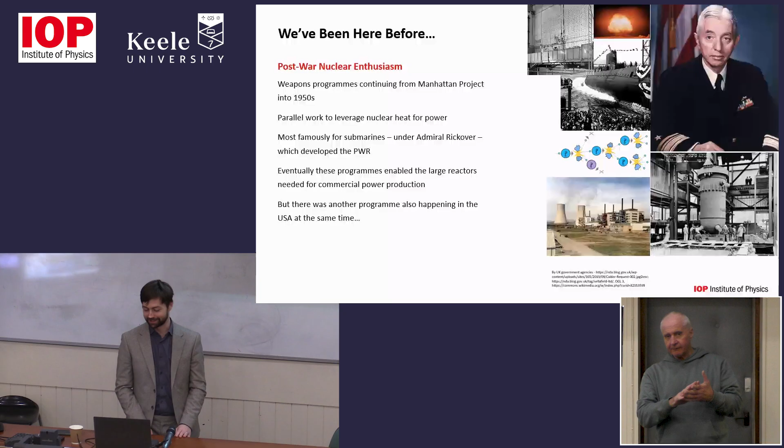Some of the other programs, and at this point, it's a new field. R&D is going out in lots of different directions. There's all these different technologies, and this one might be good, this one might be good, this one might be good. If you put a pin in that for what's happening today, there's quite a lot of parallels. The program we'll look at, that's not the naval program, so today we'll look at the Army Nuclear Power Program.

And they launched a series of reactors. Each one down on the right-hand side is a different reactor, all slightly different. They used a few different technologies, a few different locations and use cases. But the drivers for pursuing this, the goals, aren't that different from what we're doing today: reduce dependence on fossil fuels, reduce the logistics burden, reliable continuous power, infrequent refueling, reduce maintenance, and get the cost down.

The one thing that's different here, and I think sets the Army program apart from the Naval program running at the same time, was that transportable nature. They had the objective of being able to put these, in war, behind enemy lines, or to power forward operating bases. And this idea is coming back around — portable nuclear power is absolutely on the radar. The US military have a project called Project Pele, and just last month they kicked off a huge initiative to put that into production for portable nuclear power plants.

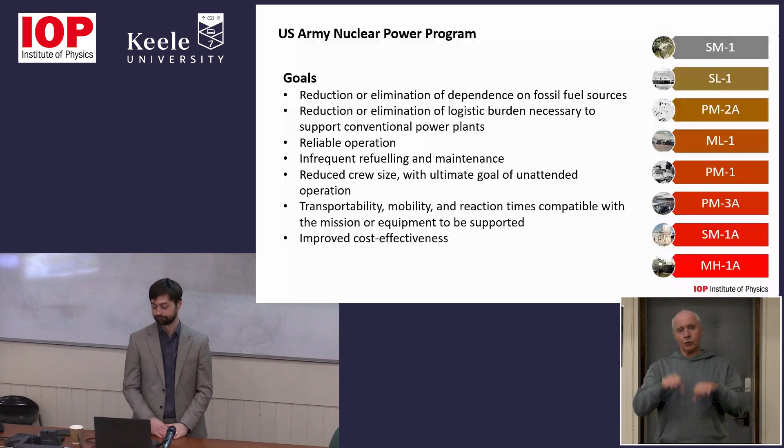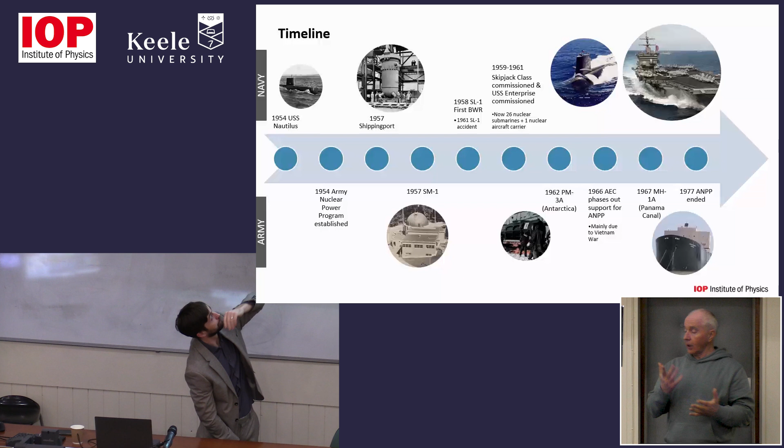So this is how the program developed over a period of about 20 years. On the bottom is the Army program, the top is the counterpoint of the Navy. By the time this program was established, in 1954, we already had the first nuclear-powered submarine — so immediately it's behind. The first prototype reactor was SM1; we'll talk about PM3A in Antarctica and MH1A in Panama. But by the time we're doing the more interesting stuff, compare that to the Navy program — you've got 26 nuclear submarines and just commissioned your first nuclear aircraft carrier. So throughout its history, this program was competing against a more successful and favoured big brother.

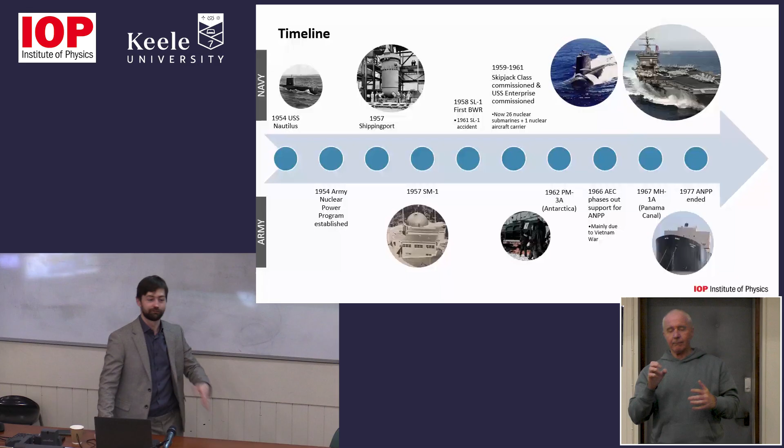For a variety of reasons, lots of them political, it was shut down in 1977. That being said, lots of learning still came out of this, lots of technology development, and all of that, both the top and bottom lines here, went into what became huge rollouts of civil nuclear power across the US, and across Europe, and following that, other parts of the world.

A couple of big successes came out of the Army program: the variety of designs they tested. They did the first prototypes of some of these more novel technologies like gas-cooled reactors and liquid metal reactors, and started to think about the different roles nuclear could play. All of these reactors were the first examples of nuclear to electricity, but the Army were thinking about how to get the heat to power to warm bases in Antarctica, as an example, and could they desalinate water with this heat and electricity. So they started to experiment with different applications for nuclear power.

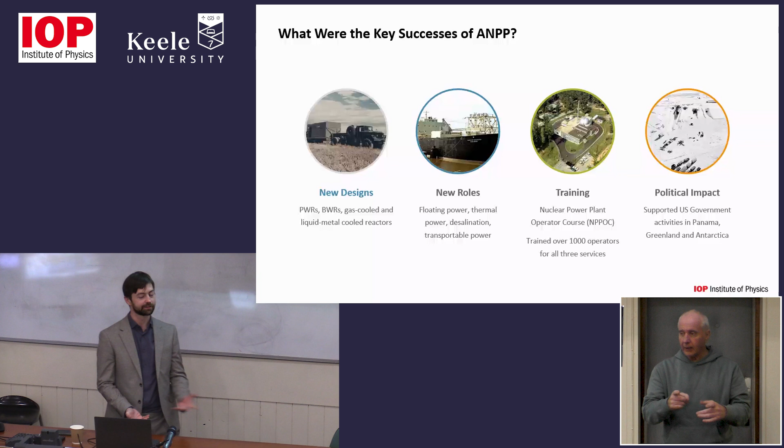It also bred a huge workforce that seeded that civil nuclear power takeoff in the US, and it started nuclear's storied history of being closely knit with the political sphere. These days nuclear and politics go hand in hand. Part of that is because nuclear power plants are big and expensive and take a long time, so you need entities like governments that can take levels of risk and have long planning horizons. But it got tangled — nuclear's been tangled a bit too closely with politics, and we're hoping that with SMRs, by making these things more of a commoditized product, we can pare back some of that and take destiny into our own hands, which would be nice.

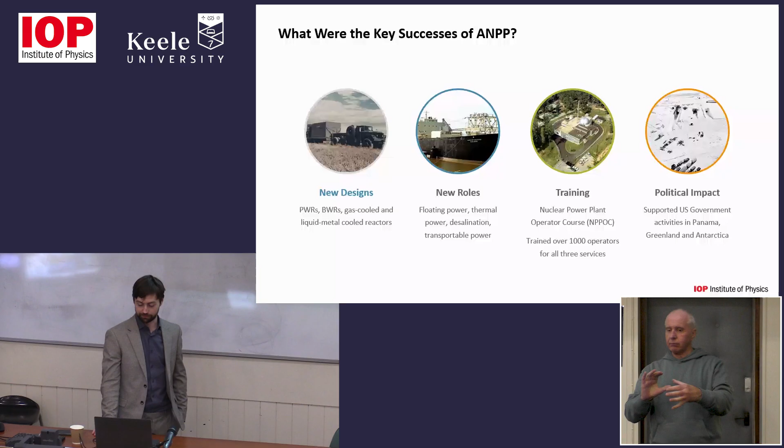It was pretty small — if there's still enthusiasm in the room, later we can watch the video. But it's essentially like a cylinder, like a big gas transport cylinder, and they shipped it in on essentially a shipping container on a ship, took it out, and set it up. They piled loads of earth around it for shielding, to shield the inhabitants of the base from radiation — essentially piled a load of Antarctic earth around it.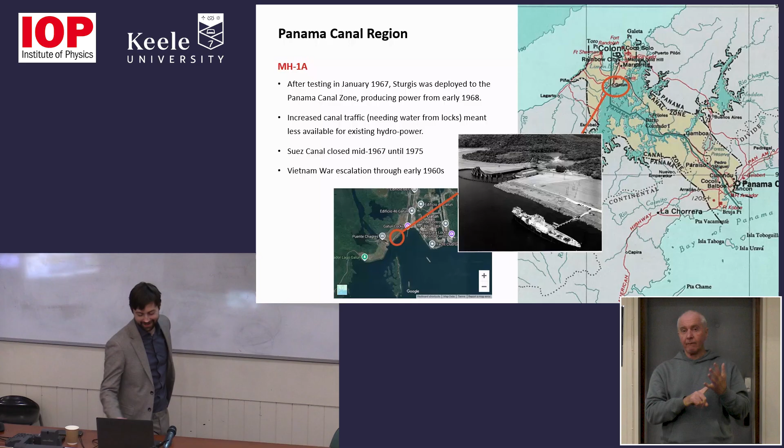So yeah, it stayed there. I think it did slightly less than 10 years, but it went down there and provided carbon-free power for all that time. The alternative that replaced it was, and still is, fossil fuels. So yeah, I think we were doing some things right back then. So that's a quick trip through the US Army's program.

The Navy program is definitely more successful. There's a lot more to point at, but the technology was fairly one-dimensional. The Navy program was almost solely pressurized water reactors, and if you take all the nuclear power plants that we have on the planet, about 70% of them are pressurized water reactors. That essentially came from that seed of the Navy program.

And even Rolls-Royce SMR is an example of what we're hoping to build in the UK on Anglesey, which was the announcement last week. We're going to be building the first 3 of these on Anglesey in Wales. It's a pressurised water reactor under the hood. It's the same stuff, it's the exact same.

So, SMRs of the future. What is an SMR in today's context? The International Atomic Energy Agency keeps tabs on all of this stuff. They have a dashboard and they publish this every year, small modular reactors, advances in SMR development. It categorises essentially all the various technologies that are out there in the world. They have a minimum threshold to be considered credible and make it into the book. And even with that, at the latest count, there are 68 different technologies across these different groupings.

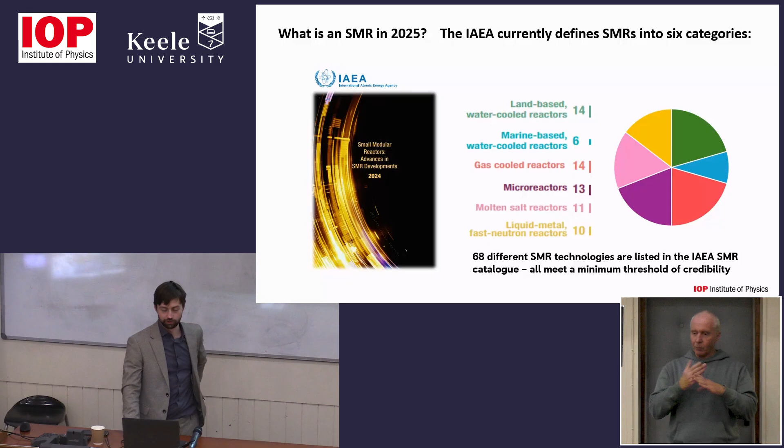Molten salt and liquid metal, and there's different flavours within all of these families. So in liquid metal you could have lead, so it's a lead-cooled reactor, or you could have sodium, a fast reactor. And various companies at various stages are trying to commercialise all of these technologies, including us. So it can be difficult if you don't have a physics degree and a decade in the nuclear industry to sift through the noise to understand which is the best. There's loads. Which do I pick?

And so you have to look at it as a timeline for what's coming. There's all these 68 plus designs. By the way, if you take those minimum criteria away and just look at anyone who's claiming they've got a design, there's well over 100. There's probably over 200. There are a lot, and some of them have more money than they should.

But if you sift that down to: what's the proven technology that we can commercially deploy at scale in a meaningful time frame? And the meaningful time frame for me here is net zero, 2050, right? We've got 25 years, nearly 24.

If it's a technology that is interesting, but I need to build a demonstrator, and then I need to validate that demonstrator, and then I'm going to change lots of things, and then I need to operate it for 10 years before I get all the operating experience and the confidence that a load of banks will give me billions of pounds to go and build 20 of them, then it's no use to me.

That being said, I sort of split off here AMR demonstrators. So there's room for still pursuing some of that R&D and building those demonstrators so that in 20 years, if we think we've got something that offers us something better, we can go and do that. So there's only about 14 if you sift it like that.

If you then look at the ones that are actually in the major competitions across Europe or the US, you get an even smaller list. And then the ones that are really credible, that make it to the down selects, you've got an even smaller list. So there is only really a handful of those near-term SMR technologies that are going to be deployed at fleet scale and be successful.

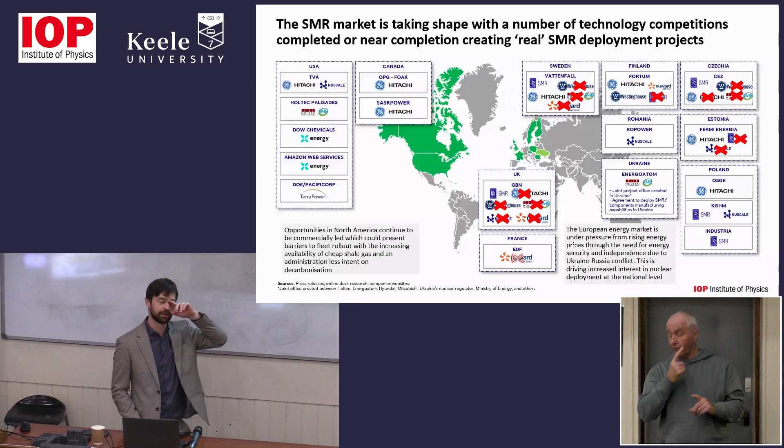So of those 5 technologies that you end up with at the back end of those funnels, whoever goes first, whoever takes the first punt on one of those, is taking a lot of risk. They're taking a lot of risk that the design's good, that the company's going to be able to follow through and deliver on it, that when you build it there's no major issues, it's delivered on time, on budget, which probably won't be because it's first of a kind.

So it's hard to take that level of risk, and it's the reason that, despite all this enthusiasm, we're only just getting those first projects on the map, and it's because you've got to solve that. You've got to figure out who's taking the risk, which might be every single one of you in the UK. So as the taxpayers or ratepayers, depending on the solutions, you guys are taking the risk, and the government's doing that because it's in our best interest that we could end up with a load of nuclear power plants that are going to really reduce the cost of our total energy system.

So Europe's good, and all these competitions that have now either ended or are in the final stages are starting to create real projects.

So we've got one in the UK, we've got one in the Czech Republic, in Temelin, South Bohemia, and Sweden, there's 2 technologies left. They down select early next year. They are the big 3. They're the big 3 globally, and all 3 projects have state solutions to risk. If we win the 3rd, we have essentially got that pathway to get all of those initial hard units, and then it becomes a little bit like shelling peas. It becomes a bit easier.

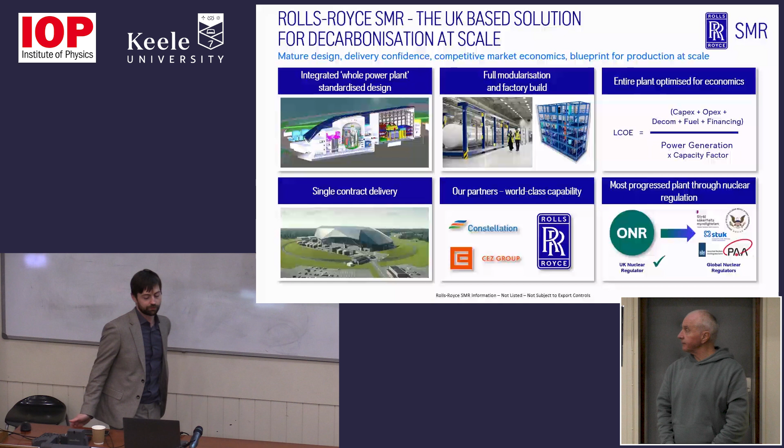Just a little bit, although it's not a sales pitch. This is the Rolls-Royce, the UK solution in a nutshell. So this is what we're going to get. We're getting 3 of these on Anglesey. We might even get 8 of them on Anglesey. There are a host of other places around the UK that we might be getting them. And that's what it looks like.

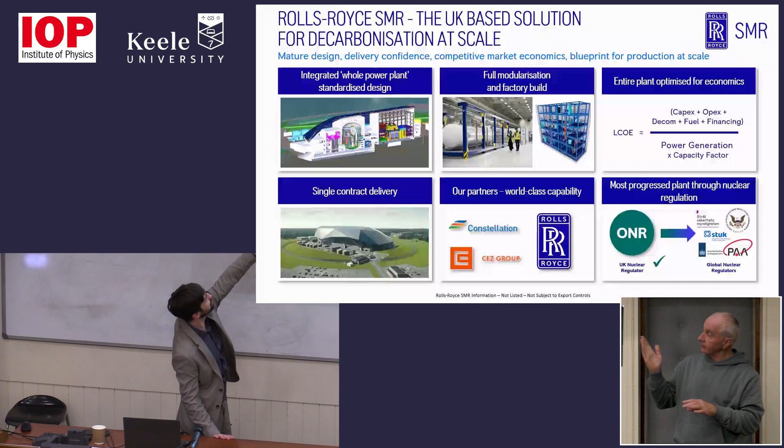For context, that sort of structure is like a football stadium. So it's an Old Trafford. Sorry, it's a Britannia Stadium, I should be saying, shouldn't I? Vale Park. Right. I'm outdated.

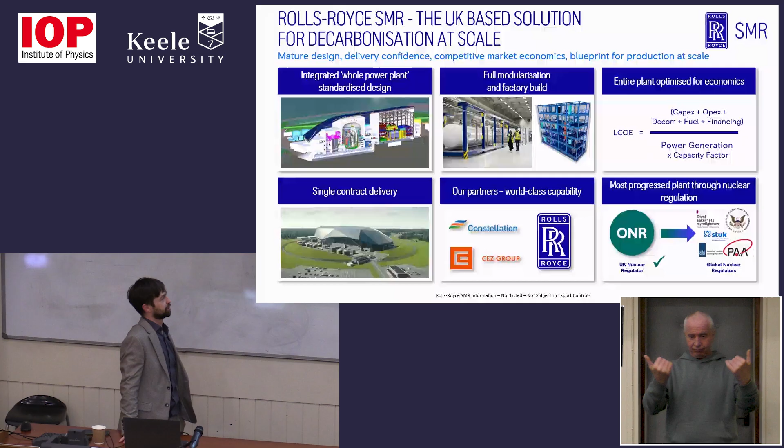So small in the name, but these are still big infrastructure projects. And they're not going in a back garden. They're big. They need the right sort of siting. The first places that they're going to go are all old nuclear power plants, where we're no longer generating; that's the most sensible place for them to go. But it's not the best place if your goal is decarbonisation and net zero. There are plenty more sensible places you could put them.

But it's not going in the centre of Manchester. It's not going in the centre of London. So just temper your expectations. It's more like big industrial clusters like Humberside, like Teesside.

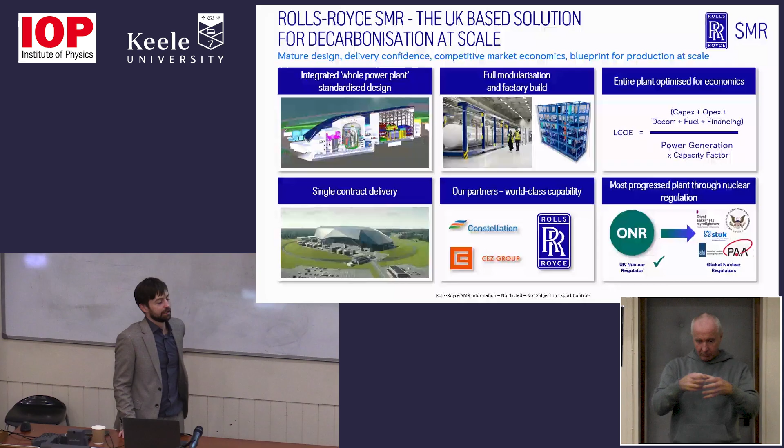And we've got a bit of a unique approach in the UK in that, of all of those technologies, we are the only one taking responsibility for the entire power plant, not just the nuclear reactor bit. All of the clever engineering, all the physics, is in the middle, in the reactor. But if you look at the cost of delivering a power station, only about 20% of it is in that reactor bit. So we've decided to take on the scope of the whole power plant, because then we can make it all work. We can handle all the differences, design it all from the get-go, and copy paste from site to site.

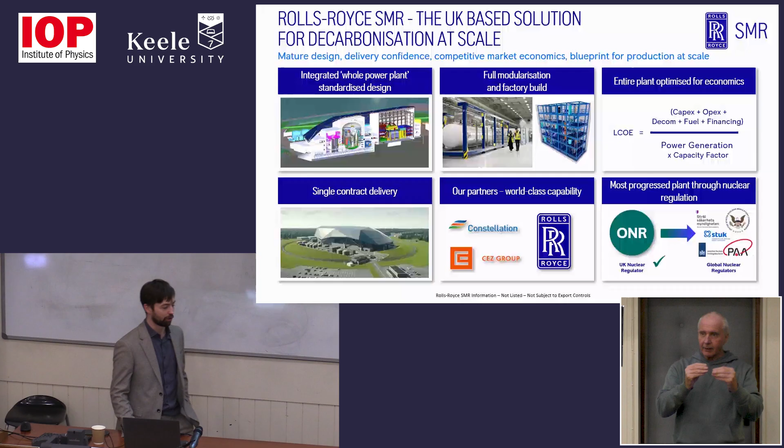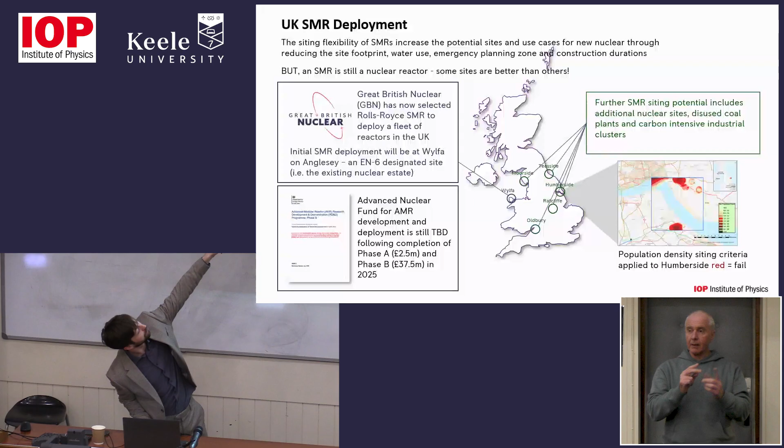If you want to know more about Rolls-Royce SMR specifically, then we can talk after. This is essentially what the landscape looks like in the UK. So the blue one, northwest of Wales, a place called Wylfa on Anglesey. That is where the first ones will be going.

It's good from a nuclear perspective because there's a lot of space. It's hard bedrock. It's got good access to cooling water, but it's in the middle of absolute nowhere. There's not a lot of interesting things going on nearby that you can provide power to. But unsurprisingly, the island is now of great interest to data centres. It's of interest to people looking to produce future fuels, so sustainable aviation fuels, hydrogen. All these sorts of industries are now taking a great interest in the island because they might have 4 gigawatts of power that they need to get rid of.

And so when there used to be a nuclear reactor there, the site had one until early 2000s, I think, there was a whole host of industry on the island. There was aluminium smelting, there was bromine works, there was gas plant works with Shell, lots of chemical processing. None of that exists now. When the nuclear power plant closed down and all the energy disappeared, all the industry died. And so the island is just holiday homes. And they've been crying out for this. The dying nuclear communities of the UK are crying out for new nuclear. They all want it. They're all campaigning for it, not against it.

In terms of where next, we sort of covered it, but yeah, industrial sites, other nuclear locations. Here's a selection of them, but could be any of those, could be others. It all depends on which developers, which utilities are going to come forward, and ultimately what the government wants to do as well. Just to give you an idea of how close you can put it to things, the picture there is a population density criteria map. And so when you try and get a nuclear site license, you go to the nuclear regulator and you say, here's my design, here's my site, my drawings, whatever. And they'll essentially give you a rubber stamp or not. Part of that assessment is, is the technology safe? But another part of it is, don't put it in the middle of my city.

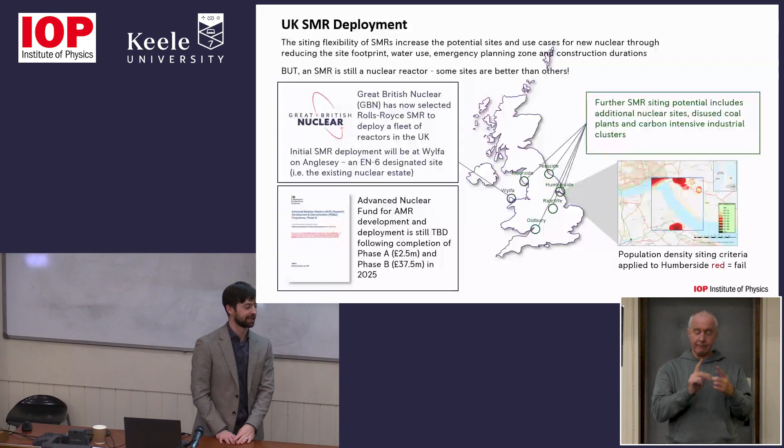But yeah, so we've covered a lot of this, but the main challenges that are preventing SMRs from really being a critical part of our energy solution are, if you step away from PWRs, all of those other technologies, even within a technology family, they're all going in completely different directions. They need completely different developments, different materials, different fuels, and there's no synergy in the R&D. If you don't know which horse is going to win, if you're a government, how do you consolidate your investment in supply chain and things like that? Because you just don't know.

Even if you do that, though, nuclear development is hard and it's very expensive. The very boring stuff of Rolls-Royce SMR will be well over £1 billion of development cost just to do the technology. That's before we even put a spade in the ground. Just to do the design and get it licensed will be well over £1 billion. And someone has to pay that. So Rolls-Royce has paid some of it. Some of the other shareholders have put money in. The UK government's put some money in. But there's a huge amount of capital that you are not going to get any return on. We don't become profitable for the next 5 years. So for the next 5 years, we continue to burn more money than we make.

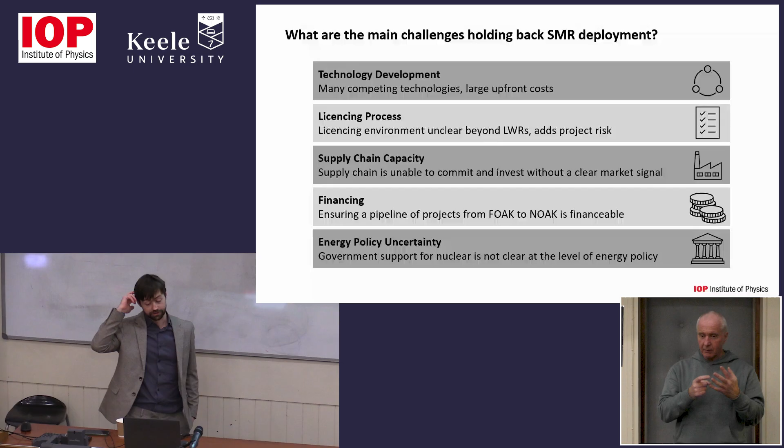But even so, even if all those US technologies want to come and deploy in Europe, they face the same challenge. And the supply chain has faced two decades of atrophy. Go back sort of 30 years ago, there was two decades of disinvestment. We've now had about a decade of investment through largely the submarines program in the UK, but also the resurgence of these SMR and other nuclear projects. So the supply chain is about at its minimum, to be honest. It's really just starting to turn that corner, and there's a huge hill to climb.

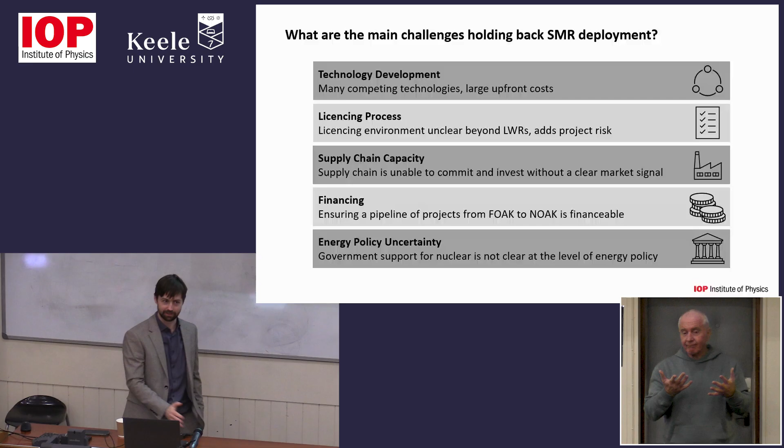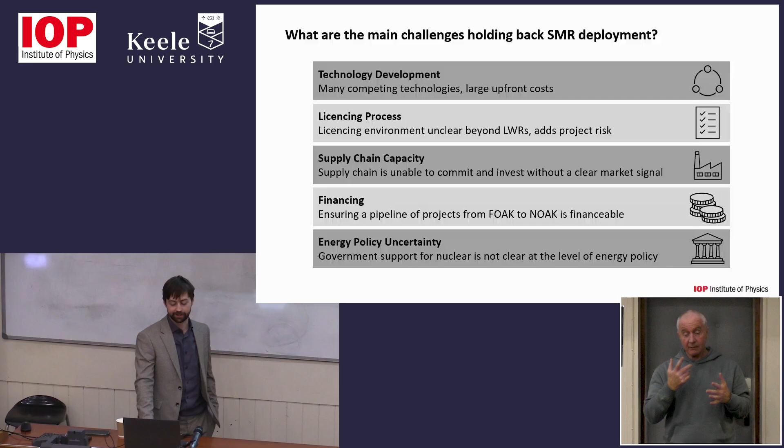If we're going to be building loads and loads of these every year, and all the other technologies are going to be building loads and loads, the supply chain's not ready because it's faded away. There's been no cause to invest in facilities, so facilities are getting older, people are getting older. So we're starting to turn that around, but it's not easy. And again, the different technologies have different component needs and different suppliers, so they can't even standardise across that.

And then the trivial matter of finding a few billion pounds per SMR is also a difficult one. To make this work you need a pipeline of orders. So if we get the three orders from the UK government, great, that's three. But that's three. What's next? I need 50 because I need to tell the guy making my pumps that I want 50 of them. I don't want three, because if I want three, they're very expensive. If I want 50, they're moderately expensive.

So we need to get that pipeline of orders and finance flowing such that we as OEMs can make the commitment into the supply chain and do those bulk buys, and that's more risk. People are taking risk by doing that. Those projects are going to go ahead and they're going to get their money back. So there's risk everywhere you look with nuclear, which is why it needs government support, especially in the early days, to deploy it. And then if you don't have that clear government policy, a la Poland, it's then very difficult, almost impossible.

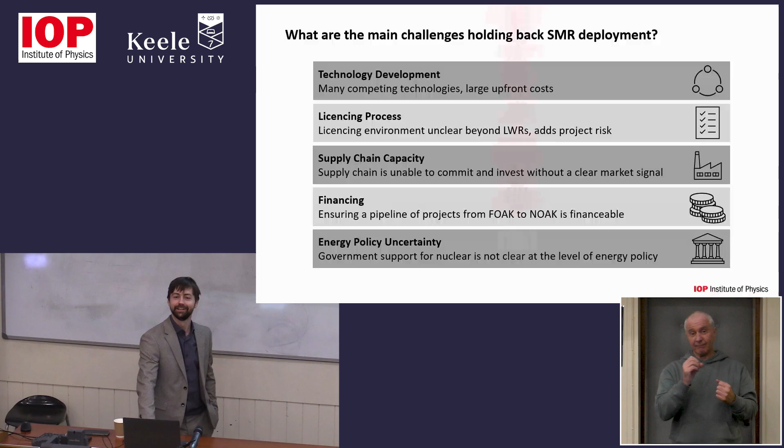And I think the UK is okay, but in terms of energy policies at the highest level, there is no good integrated energy policy around how the hell we achieve net zero. And some of the stuff around clean power 2030 is just not achievable. So there's lots of challenges, but I think we're getting there, and it's been a good news week. We are off the starting line in the Czech Republic, in the UK. I'm confident that this will be a good thing for the country, a good thing for the world, for export markets, and just for decarbonisation in general.

We do lots of work with end users of energy, whether that's hydrogen producers, steelworks, data centres. All of the hyperscalers have been all over us like a rash for the last 18 months. They genuinely cannot get enough energy. They'd have bought 50 of these if we could deliver them tomorrow. But unfortunately, the first one is in the mid-2030s time frame, which is the quickest we can do it from where we are today. But it's all too late, really, given we're sort of nine years closer to 2050 by that point.